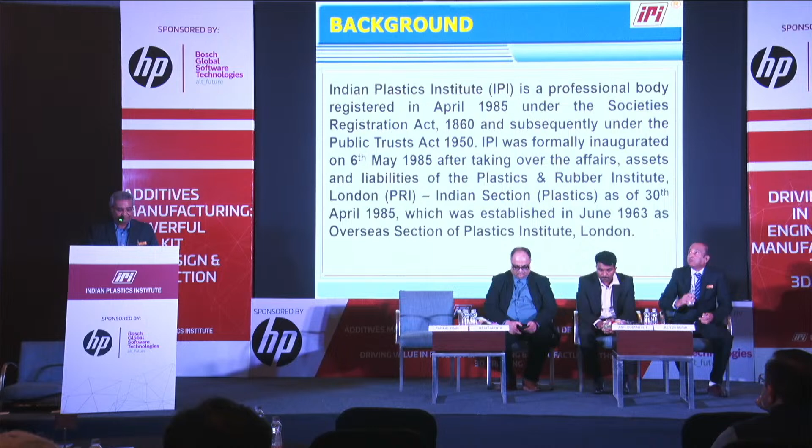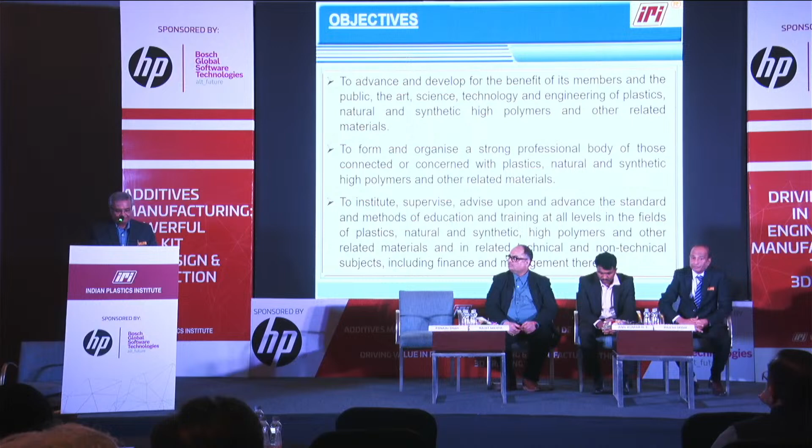IPI activities are increasing every year, and we have started getting recognition from the plastic industry. During the last year, most of the IPI chapters have organized various programs useful to the plastic fraternity. One of our main objectives is to institute, supervise and advance standards and methods of educating and training in the field of plastics. Our chapters at different centers are conducting DIPI courses, corporate learning programs, and organizing various lectures, meetings, seminars, and workshops.

Today, IPI is a strong professional body of industrialists, plastics technologists, academics, economists, and students spread over almost 16 chapters across India, and we also have 2 overseas association partnerships with Sri Lanka and Nepal. We are engaged in educating, training manpower development, and dissemination of knowledge of the latest technological developments in the worldwide plastic industry. The contribution of IPI within the context of Indian plastic industry is unique, organizing technical programs throughout the country, including conferences, seminars, lectures, and workshops.

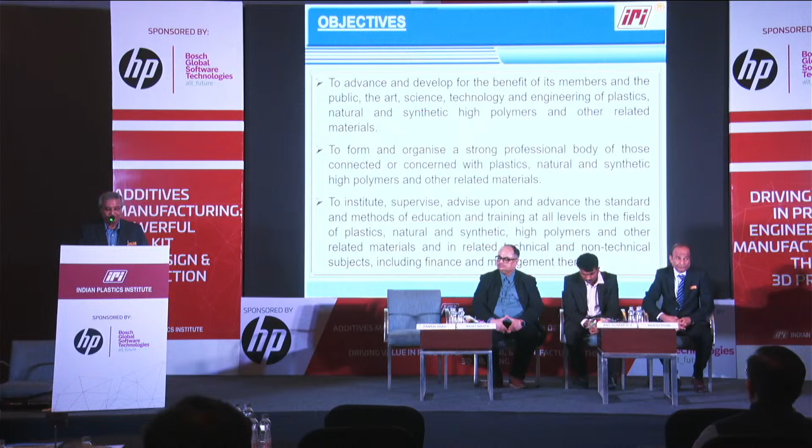In addition to its educational programs, IPI plays a vital and complementary role to universities and other educational institutes in drafting course curricula, providing visiting faculty through its members, and arranging industrial training for students. IPI is represented on the governing council of the Central Institute of Plastics Engineering and Technology, that is CIPET. IPI also represents the Bureau of Indian Standards, that is BIS, for the promotion of standardization and testing quality control procedures.

IPI is spreading its wings globally among global associations and organizations, collaborating with the Ellen MacArthur Foundation, Ocean Recovery Alliance, and so many others. Recently, we have just signed an MOU with Denmark and Germany for the sharing of information on the latest technology. IPI has also partnered, with this, I would now request Rao to take further proceedings.

We shall await the good seminar, awaiting the 3D technical presentation by these two eminent speakers. I'm quite sure when you leave this hall, you will be better in knowledge. Thank you.

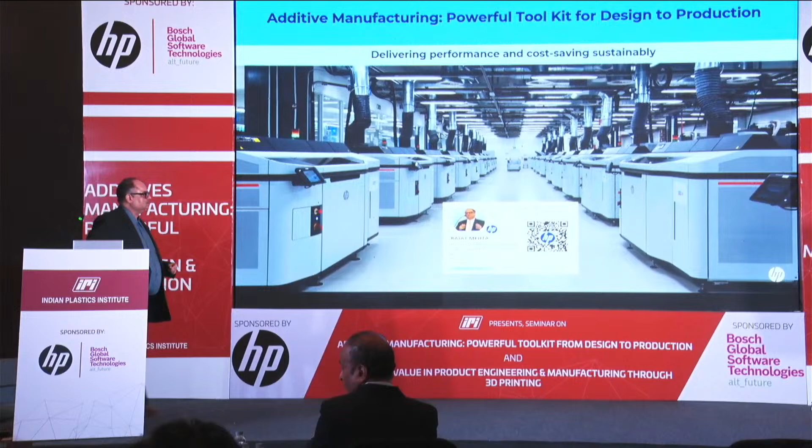Okay, before I start, a short introduction. I have been with HP for 24 years now. You don't find such pedigree these days, people change jobs in 3 years, 2 years, or maybe less. But I have been a happy HP employee for 24 years. This is the 6th or 7th business I'm launching for HP India.

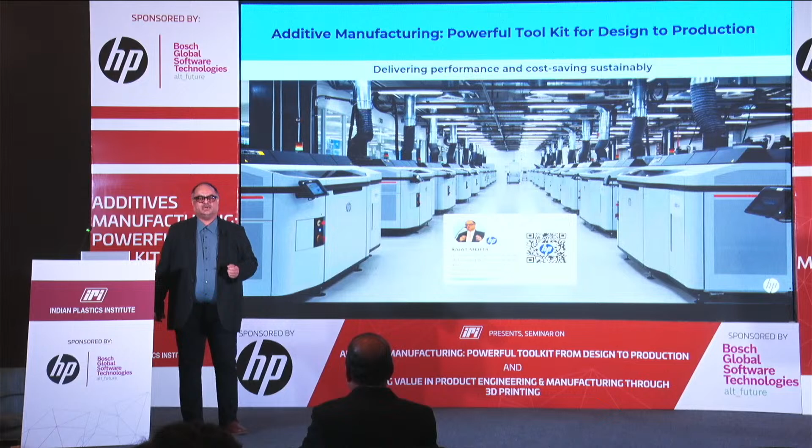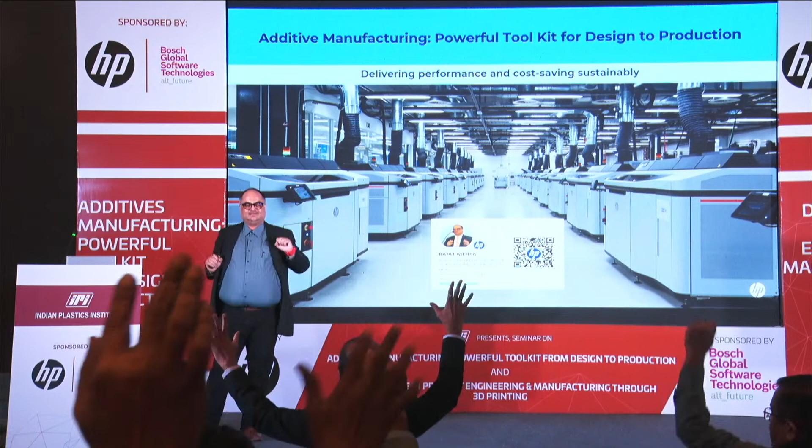It's my privilege to do the 3rd IPI seminar this year. We did it in Ahmedabad, then Baroda, now we are doing it in Mumbai. From Mumbai we move to Bangalore, from Bangalore we come back to Pune. Jai Hind! Jai Maharashtra! Jai Maharashtra! Shinde Saab will be very happy with me.

Then we always break coconuts, right, before starting something. So the coconut has to break. When we throw a 3D printed part, it should not break. So I start by throwing a 3D printed part.

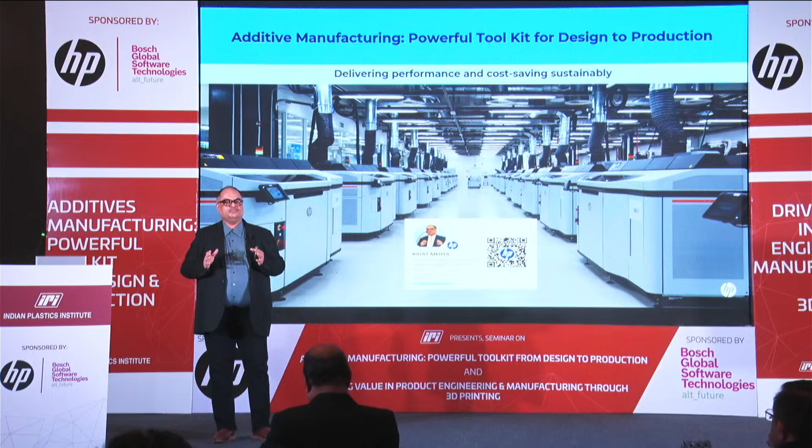The conventional thought process is that 3D printing is only for prototyping. Today we'll break that myth and see how it can benefit you in various stages of manufacturing. While you're seeing the printer, the intention of this seminar is not to sell a printer, so we are not going to talk about the printer at all. I'm not going to tell you about the price, when it is available, what the delivery timeline is, or from where you can buy it. The intention is for you to understand the technology and see if we can fit somewhere in your manufacturing process. And if yes, then we have enough capacity in India, including Maharashtra, to help you produce parts. So you don't have to invest in the printer. We would love to sell, but not right now. You have to find the right volume to invest in a printer later.

Anybody from medical line here? Aarti? Okay, so I have some medical slides also. Sorry, I and Aarti have this game about how many dentists are coming, and she said there's no dentist coming. I was looking at her.

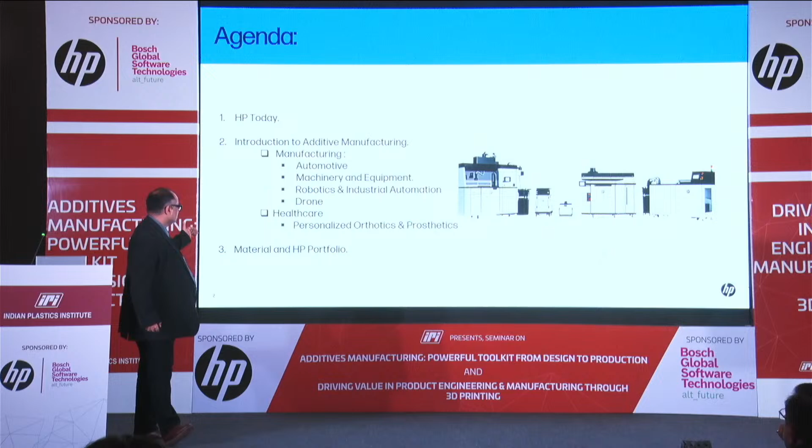So we'll be primarily covering manufacturing, automotive, machinery and equipment, robotics and industrial, and drones. We'll do some bit of healthcare, and a little bit of material.

This event is very special because in 30 years when I used to go and meet industry leaders, one of the biggest problems I used to face is, hey Rajat, you are an IT guy. You know how to build a computer, you know how to build a printer. You are talking about manufacturing a vehicle. Why should we trust you? And it's a valid question.

I don't know, my people don't know how to design a car or an industrial robot. So we said, what can be done differently? In September, we signed a collaborative partnership with BOSCH that we will go together in the market and solve engineering problems together. So I'm very happy to have Anil here, my partner who designed this whole collaboration.

The idea is that if you have an engineering problem, let me give you an example. You have to do, say, a casing for medical equipment and you don't know how to do it. You want to lightweight it, make it as light as possible. That project can be taken by HP and Bosch and deliver the solution to you so that you completely eliminate the tooling part of the job. You do everything on 3D printing.

So this was signed. This is the first of its kind collaboration agreement in the industry. I'm very happy that this is the first event where we are disclosing, where we are sharing this with the IPI community.

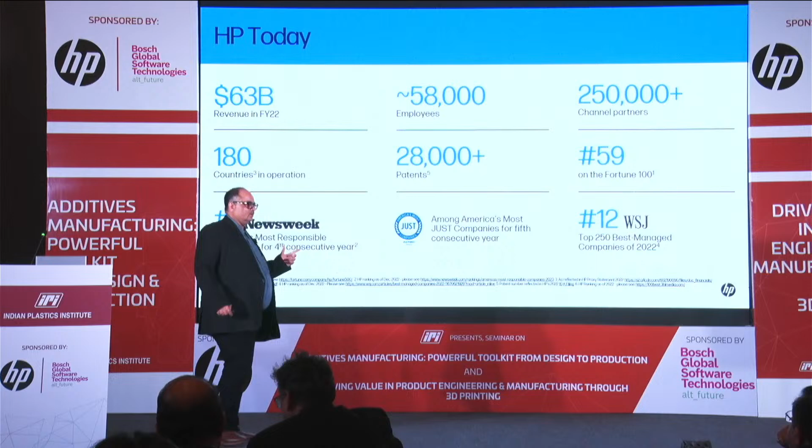About HP, we are around, this is FY22, a $63 billion company, 58,000 employees, 250,000 channel partners. There are a couple of things which are interesting. We operate in 180 countries. We have 28,000 patents.

Now if you look at the entire 3D industry, we have invested around $1 billion in R&D for 3D printers. We launched the printer in 2016. We are the youngest, and our spend on R&D is highest. If you take the 5 big companies, the top companies in 3D printing, they will not add up to $1 billion. That is the amount of R&D we have done.

Now, how many of you know 3D printing? Anybody who doesn't know? Okay, I'll assume I don't know, let me explain. So if you have an apple, and I slice that apple horizontally and give you the slices, and I tell you, can you assemble the apple back? So you'll take the lowest layer, on top of it you put the next layer, next layer, next layer, and you'll build up the apple.

Now I'll make it a little more difficult. If I say that within that apple, I want a TT ball, a table tennis ball. Now that's challenging. For conventional manufacturing, you can't do that unless you cut it and join it later, and joining is very difficult. So what happens is you have 3 processes.

You have formative manufacturing, subtractive manufacturing, and additive manufacturing. In subtractive manufacturing, it's your CNC milling machine, lathe, shaper. You take a block of material and you start removing the material. Okay, so that's subtractive manufacturing.

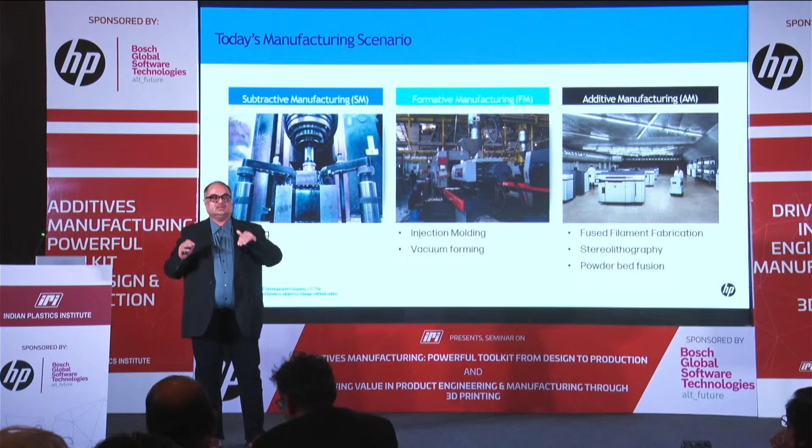Then you have formative, which you are well known for, plastic industry, injection molding, sheet metal industry. You take a material and you form it to a shape, either using a die or a mold. So if you are doing sheet metal, it will be punch and die. You will take a flat sheet, you will punch it, and it will be formed.

So you have formative. What we are propagating right now is that along with that, you can have the third process, which is additive manufacturing. And there are huge benefits of having three processes, and I'll explain why. These slides will take a little more time, and then we'll run through.

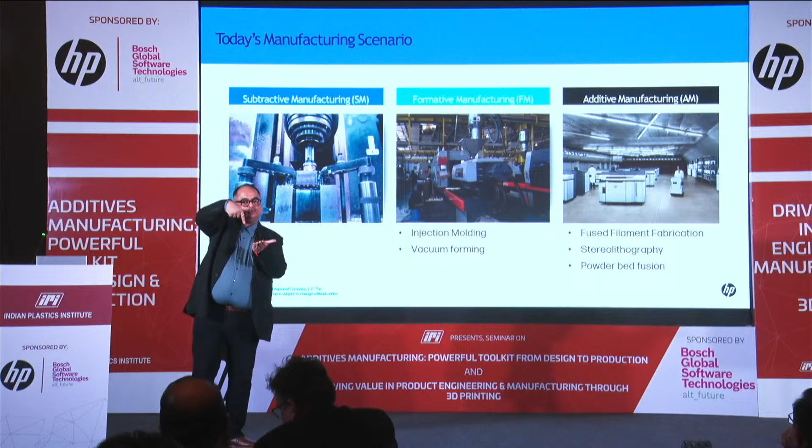When you design on a conventional process, like an injection molded part, what's your constraint? That part has to come vertically out of the mold. When designing that mold, you might say, I don't have a 5-axis machine, only a 3-axis machine, so my tool cannot go like this. So either I tilt the job for cutting, or I have to work with that limitation. So the designer comes with that limitation, constraining himself to the machine he has.

What happens in 3D printing is that the constraint goes off. You can design the part, a rectangle, a cube. Inside a cube, there could be a sphere. Inside a cube, you can have a cone inside. It can be printed without assembly, and I will show you a lot of parts. Now, can it be used everywhere? No. So the designer has to decide which process to use when.

Now the question will be, why do I need additive manufacturing? There are a couple of areas. One is that you don't require tooling for that. So when you're doing additive manufacturing, you remove the tooling cost. If your volumes are say 20,000, 30,000, 40,000 parts a year, additive manufacturing has a lot of meaning and should be evaluated. You're seeing a lot of EV vehicles coming in. Lightweighting is key. Again, in 3D printing you do lattice structures and can have light-weighted parts.

Suppose I had an amputated leg. In that case, a 3D printed socket becomes so much easier to wear. We just launched with one of our partners, a company called Edivise, which will make sockets using 3D printing.

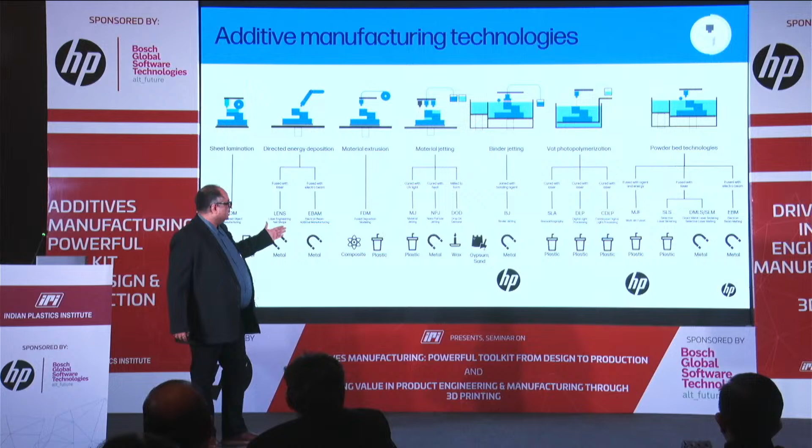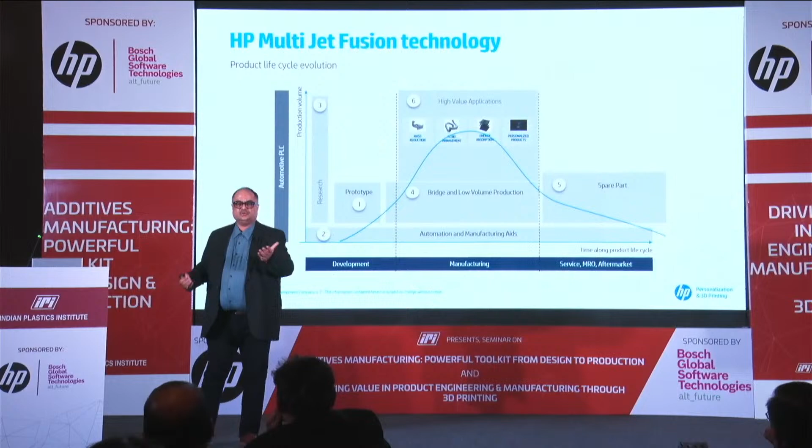Suppose you are doing a car body, which is a sheet metal, free-form sheet metal. It's very difficult to get that block right, where it will rest in the right orientation. I'm a car designer, so I speak in that language. But if you have a 3D printed part in polymer, you can create that bracket very easily in 3D printing, attach it to a metal bracket, and create the fixture very, very quickly. You can save almost 75% of time if you do a combination of metal and polymer.

Your checking gauges. When you're doing mass production, if you're a tier 1 supplier to any of the automotive companies, you have to check whether this pipe will fit or not. So you need a checking fixture. That's a great example for 3D printing. Now, some of you who are not car designers might ask, why do you have to check the pipe? If you have 1 degree variation at the front of the vehicle, by the time it reaches the back, it will be at least 20mm different, and the cutout where the exhaust pipe comes out will not fit. So it's critical that every component is checked. If you want to do CNC testing, it takes a lot of time, so you basically make a receiver gauge and see if it's fitting or not.

Then comes the story of end of life. Now if Mahindra is launching a new version of the Thar, for the old version you still have to supply spare parts. If you have all the tools stacked in the supply chain, you waste so much money. If you can do 50% or 25% of the parts as 3D printing, you print on demand. One exaggerated example: if an aircraft is not working at Bombay airport, you don't have to wait for Boeing to ship you a part. They can send a digital file securely, and you can print it on the nearest printer and put that part in. This is a little exaggerated, but that reality is coming now. So our technology actually goes across this entire bell curve.

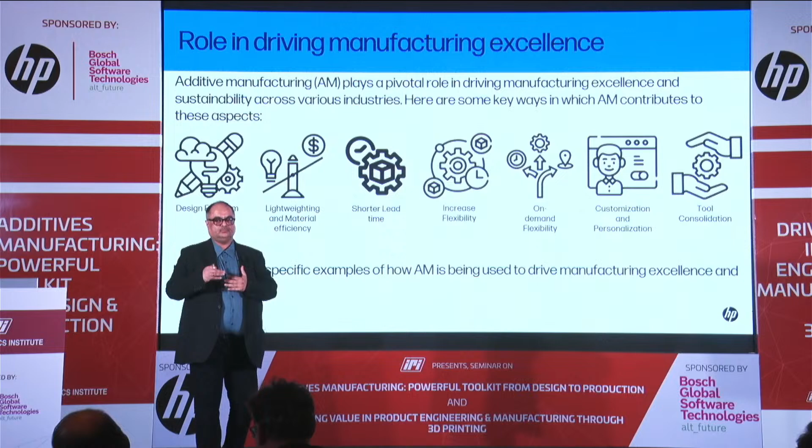And then you can consolidate the tool. What does consolidation mean? If you have HVAC parts—parts used for conducting airflow within a machine or an automobile—you can consolidate the part. Why? Because I don't have restriction of degrees of freedom; I can create a complex compound degree of freedom and do a 3D print.

I'll give you three examples from my own supply chain to make this very clear. Every plotter you buy has this block. A plotter is a large printer where you print drawings. This block was 355 grams.

Typically, when designing the old-school way, people who graduated in the 90s take a higher factor of safety. When you do a higher factor of safety, you end up with a part like this—CNC machined, 355 grams. What is the application of this part? It is a guiding block.

So when this part, which goes into every HP plotter, came to our 3D printing group, they said there's no load bearing here. They did a CAE analysis and created the first version in polymer instead of aluminum—from 355 grams down to 80 grams.

Then we asked, can we reduce it further? So they hollowed it out—what we call a lattice structure. We hollowed it, and it went down to 55 grams.

And then we did something called generative design. For people who are new, or business guys and not engineers, generative design can simply be understood this way: if you look at a tree and want to predict how the branches come, there's no formula for that. No human can predict what God or nature is using for the tree to grow.

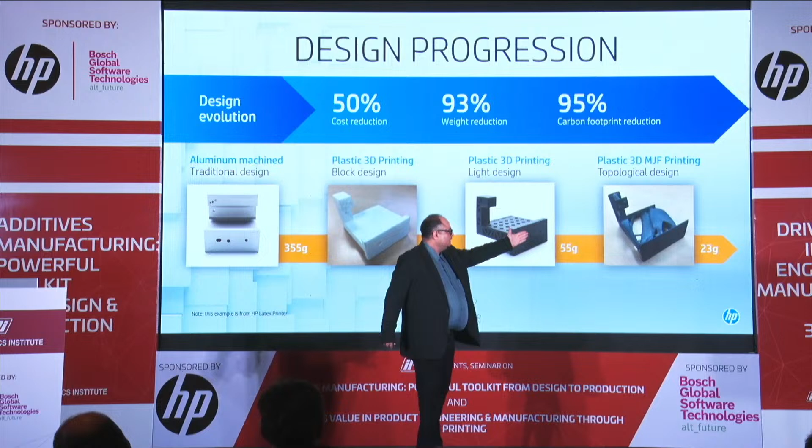Some of that algorithm has been put into the software, and you get structures like this. This basically reduced from 355 grams to 23 grams, and you can see the savings on top.

Another classic example: a slurry extraction tool in our laser drilling machine. It extracts the slurry and puts it in the bin. It had an MOQ of 13 parts, costing $450. If this part failed, it would take 3 to 5 days for the machine, and the entire line used to stop. This whole part was consolidated into one 3D printed part, which you see here, from 575 grams to 52 grams, and $450 to $18.

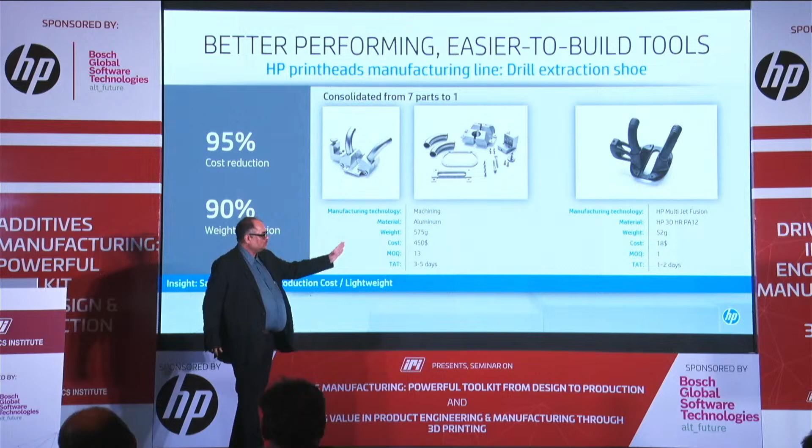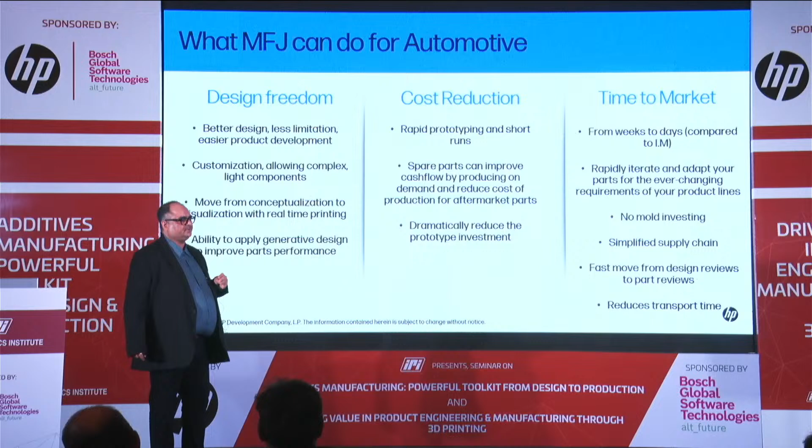Let's look at some examples. In automotive, there are three great things 3D printing can do: it gives you design freedom, cost reduction, and time to market. These are some of the examples on the field.

We launched the printer worldwide in 2016. From 2018 to 2024, we've seen one major brand or other adopting 3D printing for production. So it's not a fad, it's actually happening. China is flourishing right now with 3D printing, and we're hoping India will catch up - that's why we've partnered with IPI and BOSCH to make this technology popular in the industry.

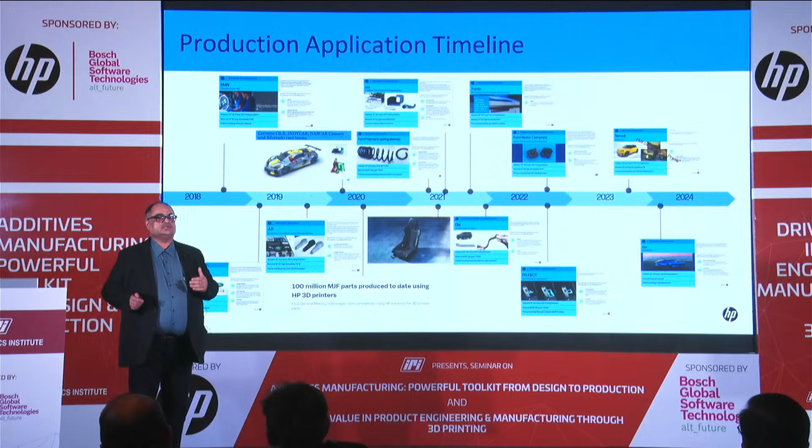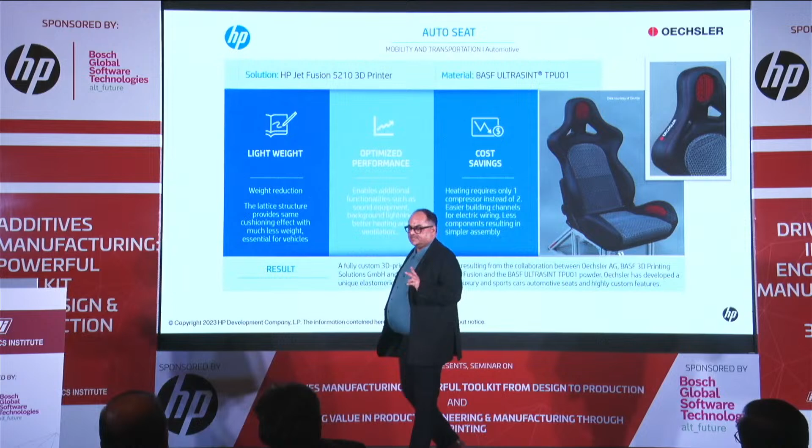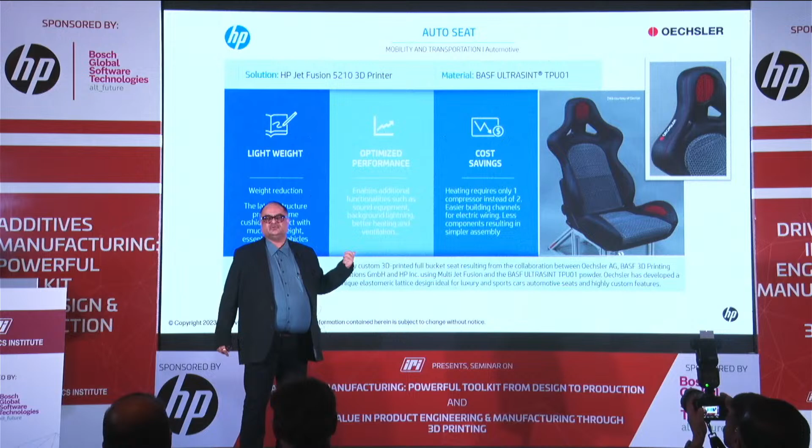This is a company called Oechsler. How many of you have ventilated seats in your car? If a person like me sits on a ventilated seat, the air doesn't flow properly because my weight compresses the foam and the air doesn't flow. This is a great example where they've replaced the foam with a lattice structure TPU, which you can see here. There are two advantages: the air can flow very easily, and second, in an unfortunate accident, this absorbs shocks much better than foam. It's also much more eco-friendly because it's 100% recyclable, and it's fire resistant.

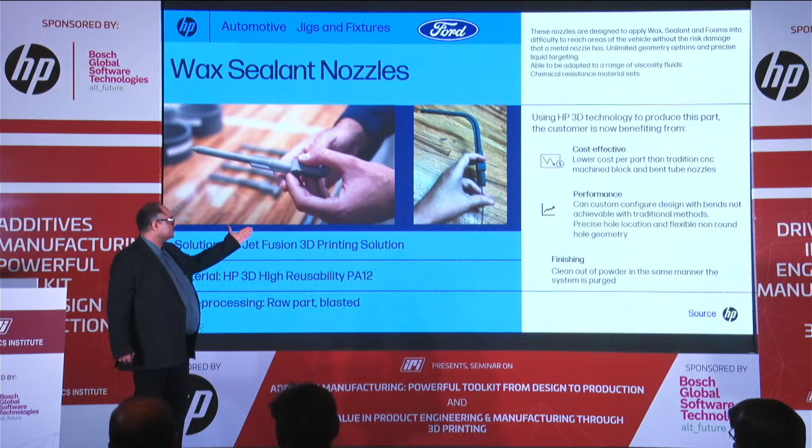This is another innovative one - a wax nozzle used on the shop floor. If you need a different shape of wax nozzle, you can do it in less than a day's time, giving you a wax nozzle which is curved like that. This is another example from Ford.

This is an example of bridge tooling. Suppose you had a conventional injection molding tool and that tool broke. What would you do? You'd try to repair it or send it to the vendor who supplied the tool. What happens in that interim period? You can use 3D printing to create the part and fit it in the automobile.

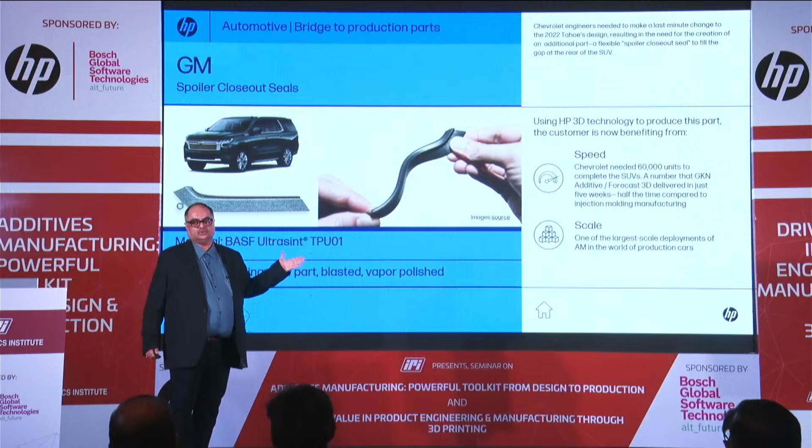It's very interesting - people who buy cell phones regularly, if you look at a 3-year phone cycle, companies make more money from selling you covers than from the cell phone itself, especially brands like Spigen. So customization and personalization means making a standard product your own product. It could be an insole for a shoe, a dashboard customized for your friend or family, or a cup holder.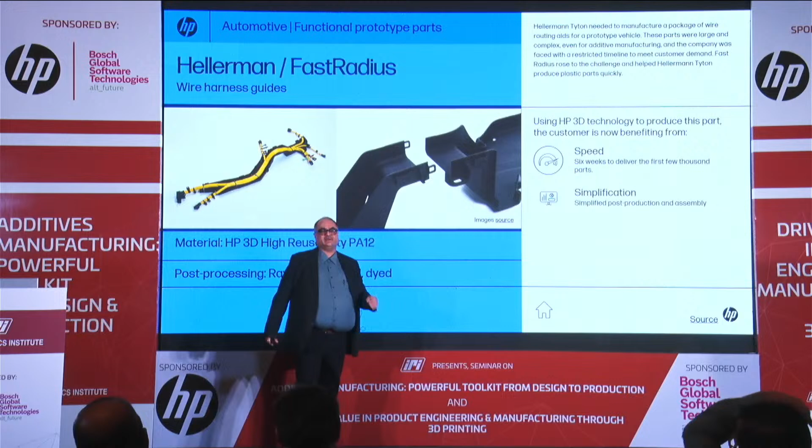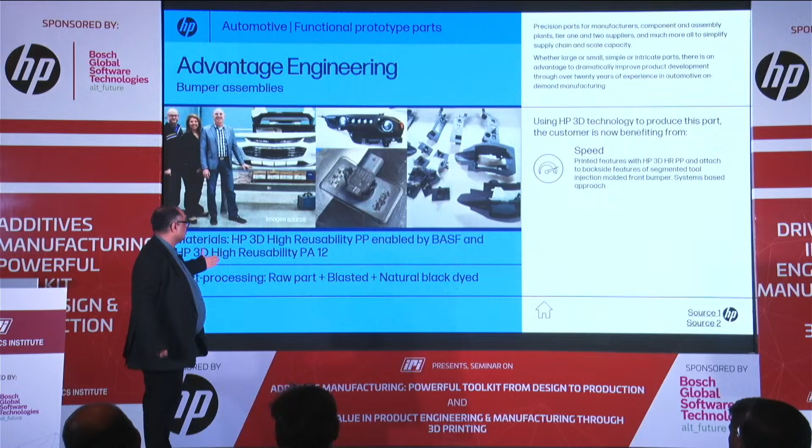If you have very large parts, we can do large parts for functional prototypes and prototyping. We can even do the bumper itself.

Another example to keep in mind is jig and fixture tooling on your shop floor. A simple example: if you're manufacturing a 200 milliliter Colgate tube and then switch to 500 milliliter, you require a different holding device, typically made of metal, which is very expensive. You have to stop the line, unscrew the metal fixture, and put in a new one. But with a 3D printed fixture, it can be snap fitted. Now we have ESD material, so it can be electrostatic discharge compliant, meaning even in an electronic line we can have fixtures that comply with shop floor requirements.

This is a classic example, a compound angle. Normally you'd need a CMM machine, a coordinate measuring machine, to measure the dimensions of this pipe. But with a 3D printer, you can create a gauge where even a normal worker can check it, if the part goes in, it's a pass, if it doesn't, it's a fail. Simple innovations that save a huge amount of time.

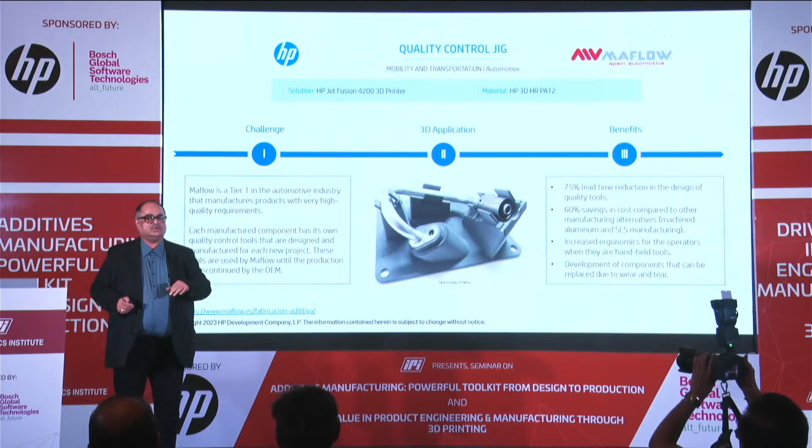If you go to Volkswagen, Tata Motors, or any of these companies and look at the time and cost they spend on jigs and fixtures, it's mind-boggling how much money can be saved. We have Amuse 3D in Chennai, who is actually producing dedicated jigs and fixtures on the machine.

Then you have personalization for key fobs. If you want your key to look a little different, you can have this.

Then we look at machine equipment, where the amount of money saved is much, much higher.

This example is very critical, a can twister. If you buy a Coke can, the cans typically move on the line horizontally, but for filling they have to be turned vertically. This mechanism does that. On conventional manufacturing, you'd make each of these pipes separately and then assemble them together. With 3D printing, it can be done in one go.

Similarly, we talked about sustainability. Wherever you can save metal and use recyclable plastic instead, sustainability is achieved. We're working with many petroleum companies right now to convert metal to polymer, trying to convert stainless steel, aluminum, or other metals to polypropylene. This is happening live in most oil companies in India right now.

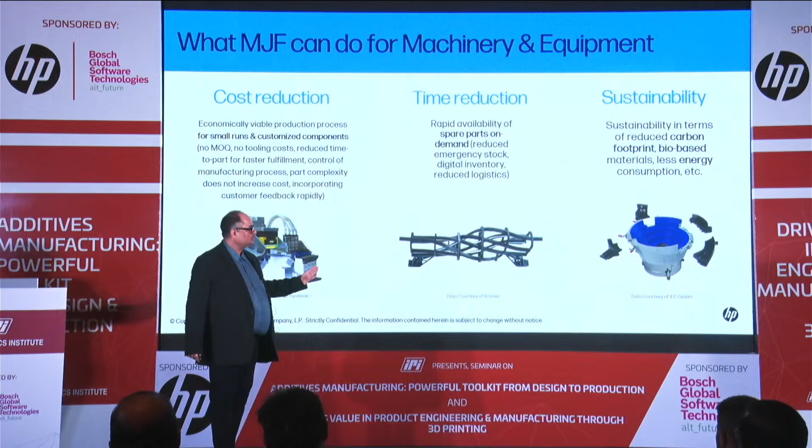These are a lot of examples from processing, packaging machinery, agriculture, textile, woodworking, and other equipment.

This, by the way, is an L'Oreal mascara. I was giving you a toothpaste example earlier, this is a mascara holder. When the mascara is being filled on the line, these are basically the holding fixtures for that. The beauty of this is that you can create a prototype where the brush, the cap, and the base are printed in one go, without the need for any assembly.

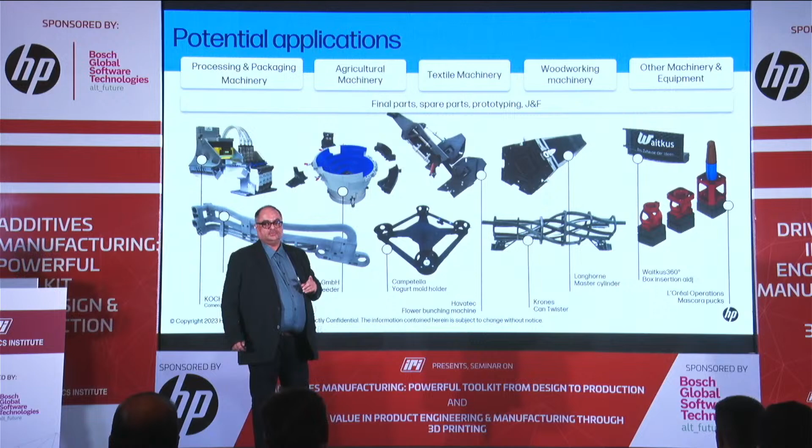Robotics is another great area. You use servo motors in robots, so industrial robotics will use servo motors. If I make all the end of arm tooling in metal, I need increased power for the servo motor. But if I can convert that end of arm tooling to polymer, the robot consumes less electricity, and my servo motor voltage requirement goes down. This is another example where 3D printing plays a big role.

Another example is picking up something delicate. Having a plastic or polymer end of arm tool is much safer, so we can pick up the glass very nicely and put it on the assembly line wherever it's required.

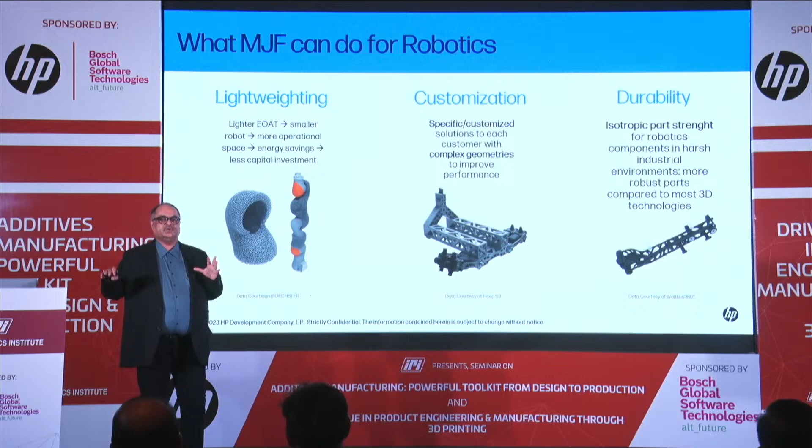And there are tons of examples. I'm not going technical at all today, but I'm just giving you some ideas. I'll introduce my friends here who can print it for you, who can design it for you, so you don't have to buy a printer for that. These are some of the examples.

Now if you look at this one, I don't know whether it's visible at the back, this is all madhumakhi ka chatta - lattice structure is nothing but beehive. The inspiration in 3D printing comes from nature, whether it's generative design or hollowing structure or lattice structuring. Madhumakhi ka chatta, by the way, is the strongest structure, and now people are using that structure for spacecrafts, because it not only makes the weight lighter, but gives you much better strength.

My favorite topic, drones. So which was the company which made headlines recently by going public on drones? Any idea? Any idea which is the Indian company who manufactures drone, which is now listed on stock exchange?

Great answer. So Idea Forge started the work with us almost, Jana, was it 4 years back? They started in a small room, and all the parts were done by Jana. Jana, can you stand up? Jana is general manager for Redington, who's our partner. It started with small experiments - give me 5 parts, give me 10 parts, like that. Today, their entire drone is done on 3D printing. They're not only feeding Redington, which is Jana, but it's feeding 5 more service bureaus of ours.

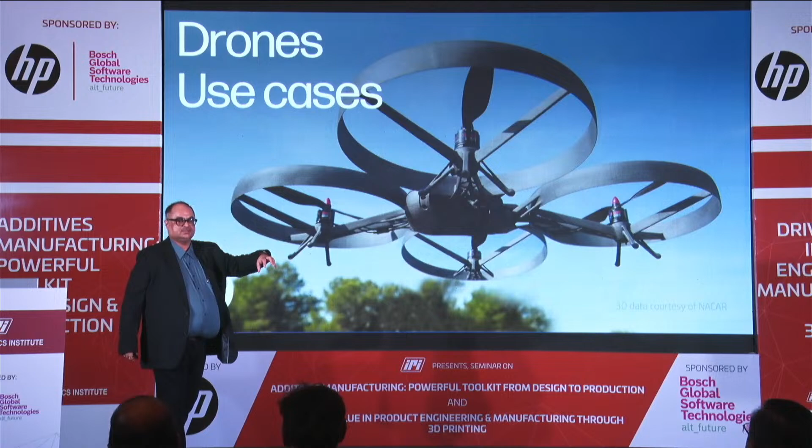One of the bad examples was throwing tear gas shells on farmers, but again, the drone was repurposed for throwing the tear gas shells - wrong example, but that's the example. You can do the entire casing for drones, which you can see here. You can do underwater drone parts, which go inside the water, which means the parts you are creating with engineering plastics are inert to water, gasoline, or any chemicals.

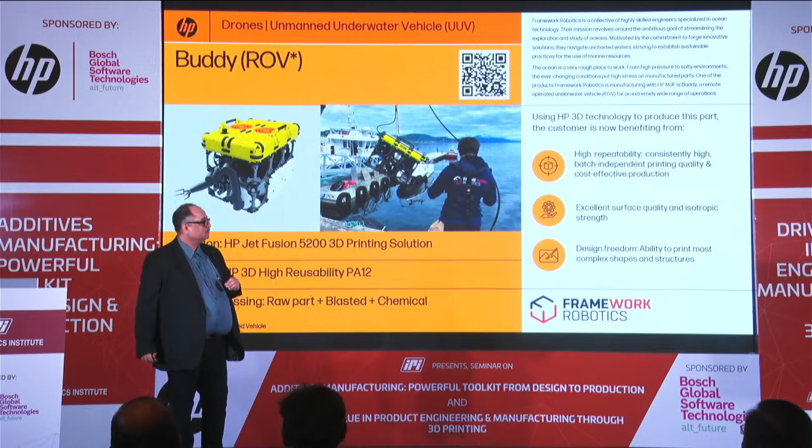This is a startup, Vecros, started from IIT Delhi. 2 young kids, 23 and 24 years old. They started this business as part of startup incubation.

Anybody has known Vecros, where they were recently? How many of you do Shark Tank? How many of you see Shark Tank? Most of you, right? The drone company which came in Shark Tank and got 1 crore rupees from Aman was actually Vecros. The entire drone is done on HP.

This is a camera module for drones. The entire module which you see here is printed in one piece. That's the beauty of 3D printing - you have compound angles, complex angles, and you can do it in one piece. You don't have to create assemblies of parts.

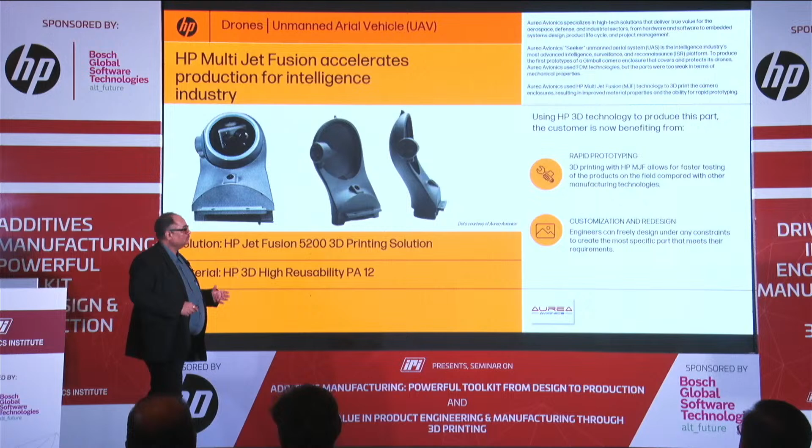This is another good example. It will not be visible from the back, but these are aerofoils. So if you have large drones - where was a large drone used recently? In Israel, to drop a bomb at a very well-known person's house. So in such kind of drones, you need aerofoil to make it lightweighted, and you can use 3D printing to lightweight the drones.

Now that's again a bad example, but a good example would be climatic surveillance, how the climate is changing. Or in Rajasthan and Punjab, you have tidde - you know what tidde is? The flying crickets. They spoil a lot of agriculture, they create a lot of problems. There, these surveillance drones can be a great asset.

This is a beautiful example of generative design. You could have a structure like this. There's no way a conventional manufacturing process can make this part in one piece. And obviously they cannot make the part itself, because you would require maybe a 15-axis machine to machine this part. But this can be done in 10 hours of printing and 10 hours of cooling, and you can print probably 100 such parts in that 10 hours' time.

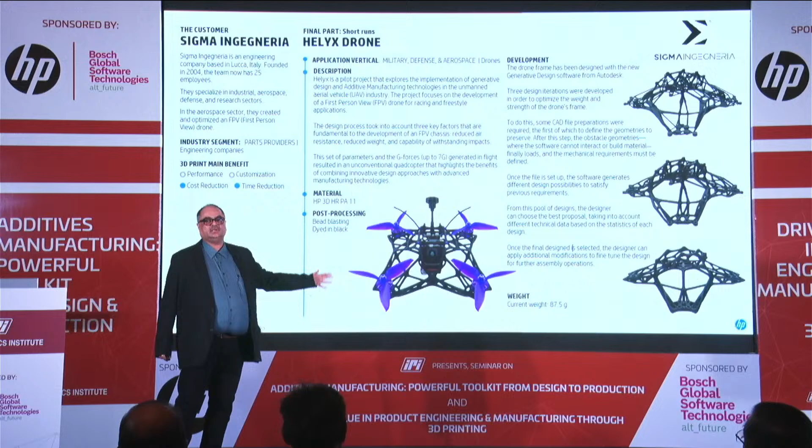This is something which is very close to my heart. We use substandard sockets, so people who have unfortunately got an amputated leg, we do manual making of sockets. It's very, very uncomfortable and unhygienic. You have people having rashes, so they will have bandages, and on bandages they will try to insert the foot. Or somebody breaks a hand and they will have a plaster, which after 1 month you need something like a knitting needle to put inside because it's so itchy, because there's no air circulation.

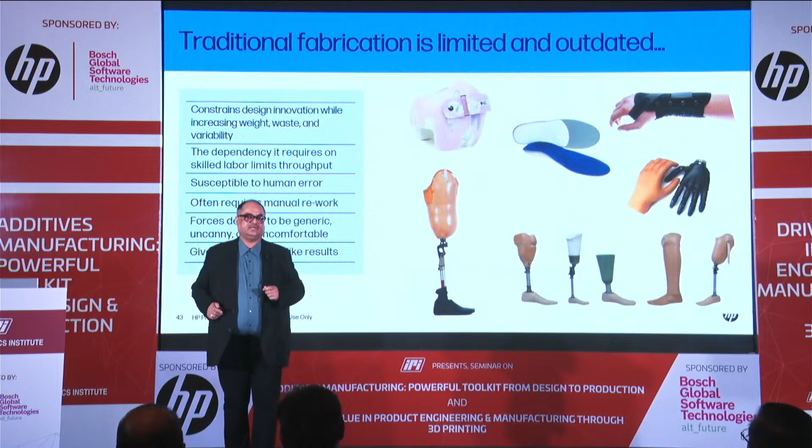I have a customer in Delhi named Adroitech. They created solutions for people who have got 99% or 95% burn on one part of the body, and it's completely gone. When they're trying to do skin grafts, you need to keep that part of the body exposed. They have created a 3D printed chamber with air conditioning to keep the arm cool and inert to all infections. So there are very innovative things you can do with 3D printing, especially in the orthotic and prosthetics area. This is what happens when you start using 3D printing.

This is the insole. Somebody breaks a hand - instead of having that itchy plaster, you could have just a 3D printed cast. And these are live examples which are available in India right now.

A child with a cranial defect or skull defect needs to protect the skull. When I was in 9th standard, I broke my skull - that's why I'm a little erratic when I talk. The doctor told me that for the next 3 years, I should assume I'm wearing a helmet which is 10mm thick, so that I should not bang my head anywhere, otherwise everything would collapse. But if you have a cranial helmet for kids as well as adults, this is protection, and it's very lightweight, because you can see all the holes here, which makes it lightweight and aerated.

How many of you have heard of Jaipur foot?

So we are recently talking to Jaipur foot and telling them that you can do better than plaster of Paris sockets. This portion is 3D printed, assembled to a metal, and then you have a blade which is again 3D printed, so people can run even with amputated legs. You'll have seen a lot of what are called blade runners - the blade runners were all 3D printed.

This is very common - when you go to a good hospital which wants to make money and you say that I have spine pain, the straight answer is that you go for spinal surgery. When a person goes for spinal surgery, you need a brace around to keep it straight till the time healing starts, and you can have 3D printed braces for that.

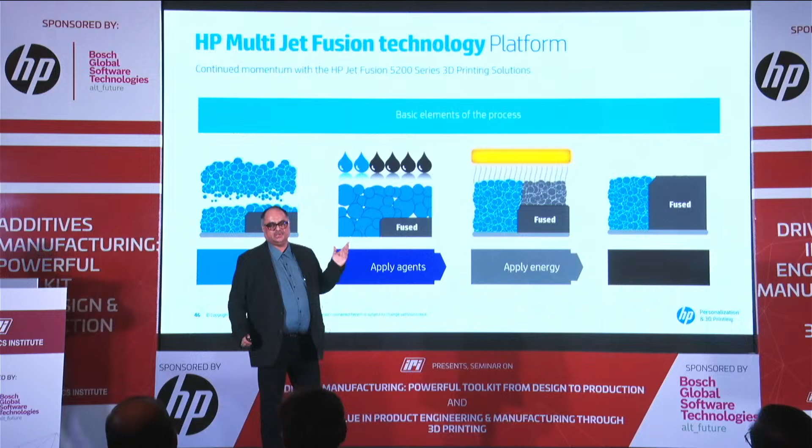Because this is a technology developed by HP, by varying the fusing and detailing agent, I can change the properties of the part. Most of the parts you see are in gray color, but I can print a white part on the same machine by changing the agents. In future, I can have transparency coming in with powder technology.

For people using 3D printing for now, we don't use any support structure, so you don't need to clean the supports. The part comes in, you do a bead blast, and you have the part ready.

This is a portfolio of machines which we have. I'm not going into details, but these machines are amply available in India. All we want is basically that next time when you are doing an industrial design and you have a problem, please call us and we will try to help you solve the problem. See if we can eliminate tooling for at least some of the material.

We took an oath to make it sustainable. So if we don't do the tool, we are saving so much of metal.

So in Bombay, we have... Arpit has come? Arpit? Come to the front.

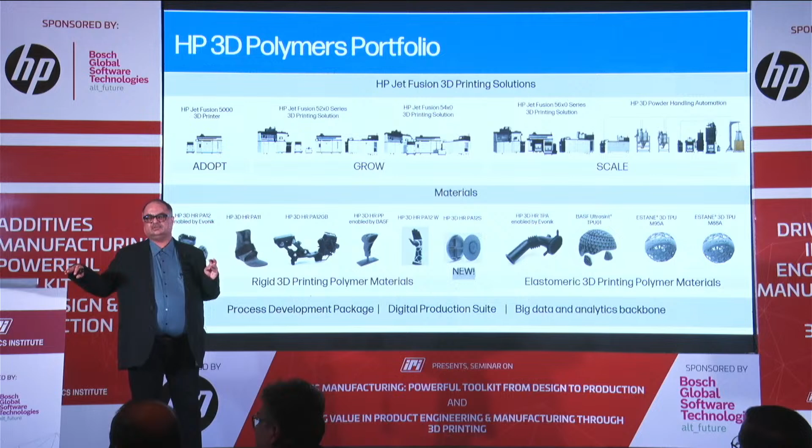Arpit is from Immaculate 3D, well experienced in 3D printing. He's based out of Bombay and now he's opened up an office in Bangalore, so you can contact him. Again, we don't want you to buy a printer, we want you to use the technology. So Arpit will help you.

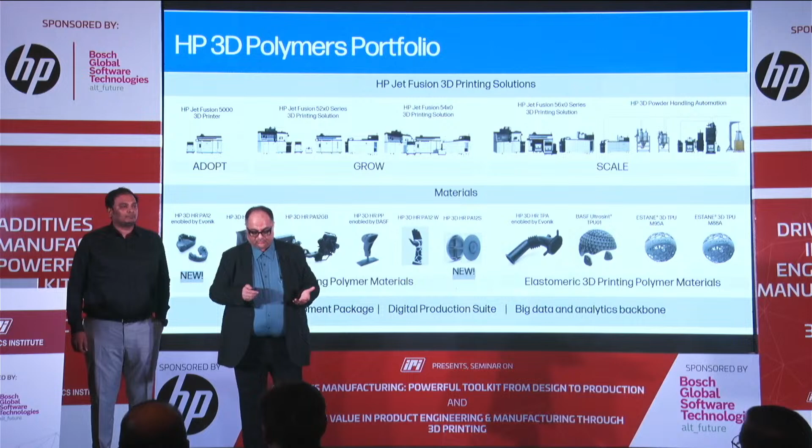We have another player, which is Imaginarium. A lot of you know them. There are many printers from our side, you can use Imaginarium. If you want somebody next door in Pune, we have Create 3D. And Arpit is expanding, so what you saw here, Arpit is actually manufacturing this for my partner Ediwise. So thank you, Arpit, for helping us.

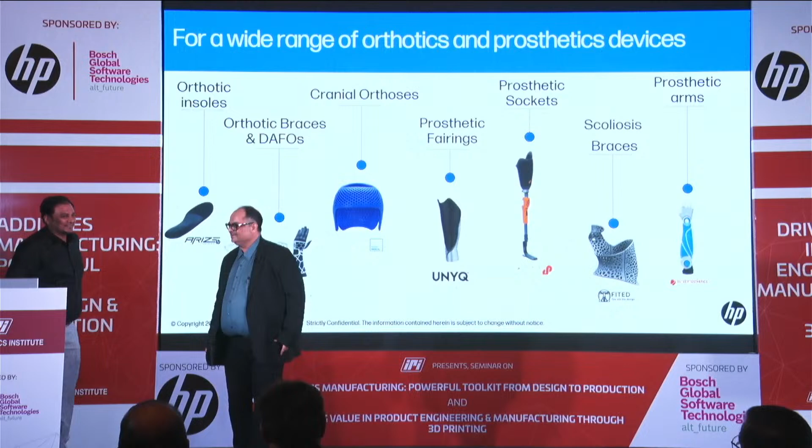You want to say something? No, you can go ahead. Okay.

So the idea is that you start using the technology. When you feel that volumes are right, we will come to your office and say that you are hitting a critical mass, it's time for you to invest in the printer. You don't have to do a capital investment on the printer, we'll give you a printer on lease. Okay?

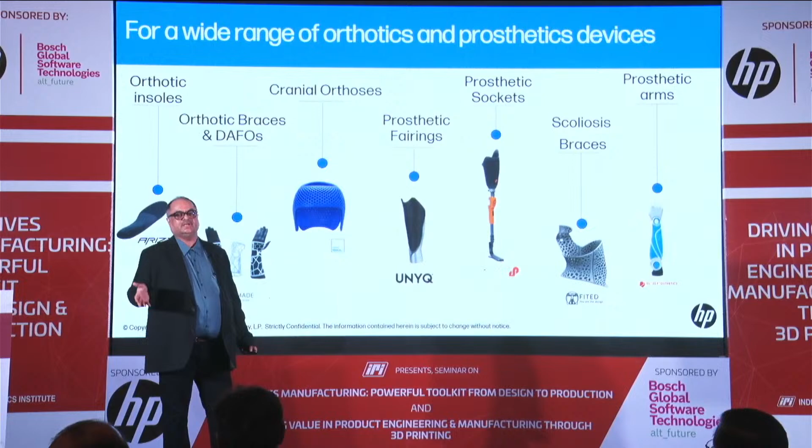You can have various types of fit. Like your question would be, while I can print in plastic, but I need an insert to screw the part. So you can have metal inserts, and you have examples, Basha, right? Can you pass that part around? You can have snap fit, you can have ultrasonic welding, so you can weld the parts together which are plastic. And you can do adhesive bonding also. So there are various ways of joining the parts.

You can have various types of finish.

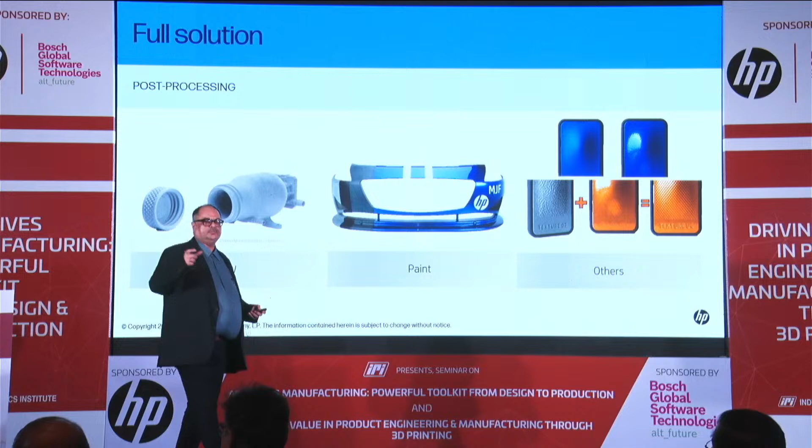For people from the medical fraternity, clear aligners is something which is becoming very popular in India, started by Invisalign. Now Clove Dental is trying to get into that business. This is a great example. You can manufacture 1,000 molds, right, Jana? 1,000 molds for dental, yeah. 1,000 molds you can do in one build. So in 10 hours, you can build 1,000 molds, and then you can do thermoforming and create clear aligners. So another great example. Thank you, Aarti, for not telling me there are doctors, but I'm still reiterating that you could have 1,000 molds coming in from one build from the printer.

Now what you see here is a normal painting. So if you buy a vehicle, what they use for other material, they will use the same process for painting the car. How many of you have the XUV 700? The first 400 vehicles which came on the road had 3D printed parts, and Anand Mahindra actually asked the engineers to look at more possibilities of using 3D printed parts. It was done by a company called ITW, and again done by Reddington for ITW.

All these materials we are talking about are certified, so it's not that these are uncertified material, these are industry standard material with all the certification.

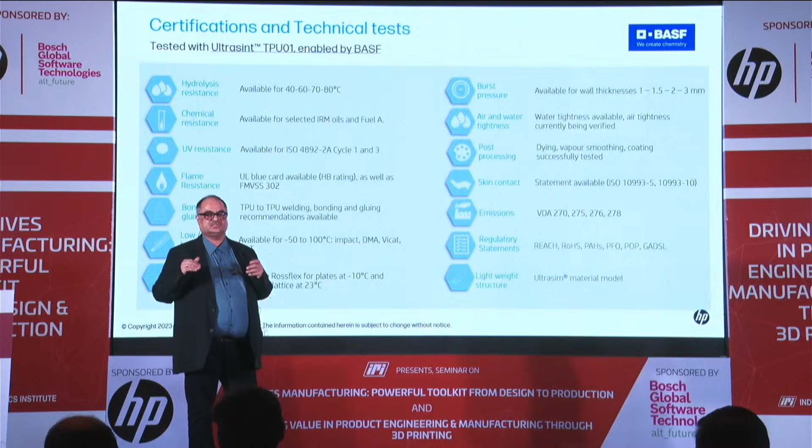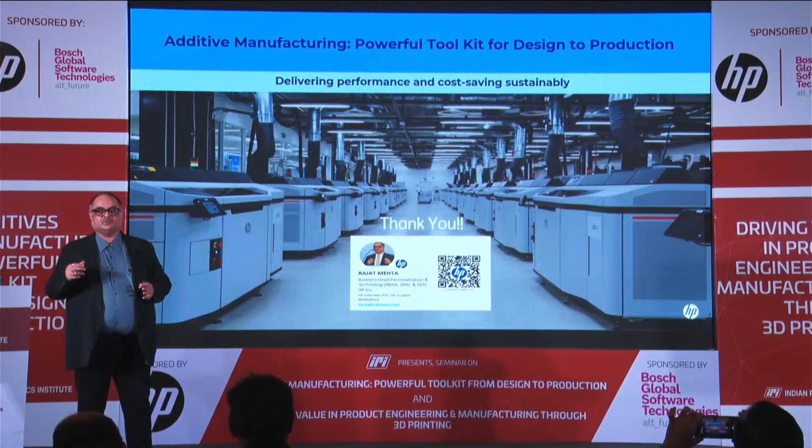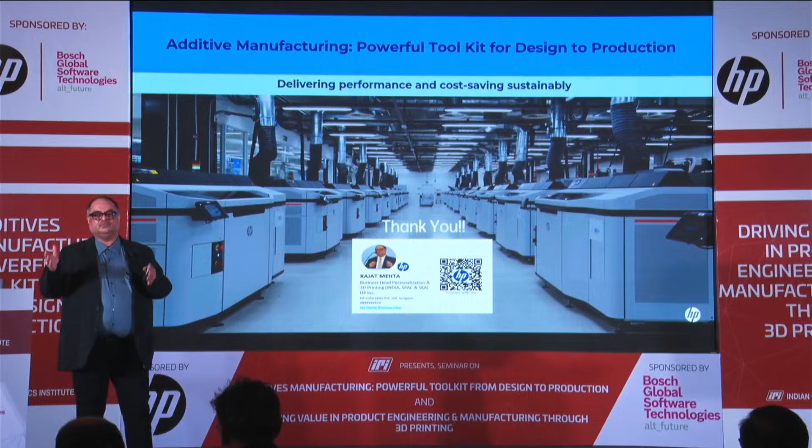I've kept my talk very, very non-technical. The idea is that we don't want you to get lost in the technology, we are there to solve it. Give us the problem. If it's just a printing requirement, you could go to Arpit, and Arpit can print it for you, or you can go to any of the service providers. But if it's an engineering problem, where you want to do lightweighting, complex parts, end-to-end tooling to be done, you contact me or Anil, and we will solve that problem and give you the complete solution as a turnkey. Okay? With that, I will finish my talk.

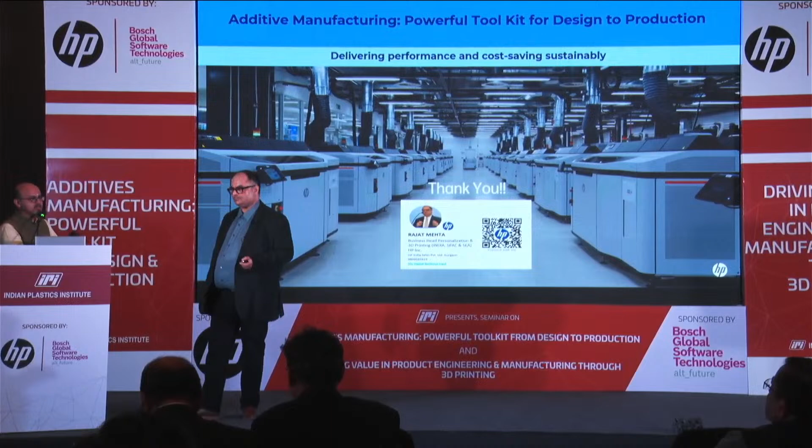Yeah, sure. We do the question answer in the end or now? We have a Q&A session, so once we are done with the second presentation, we'll have a Q&A together. Yeah. Anil?

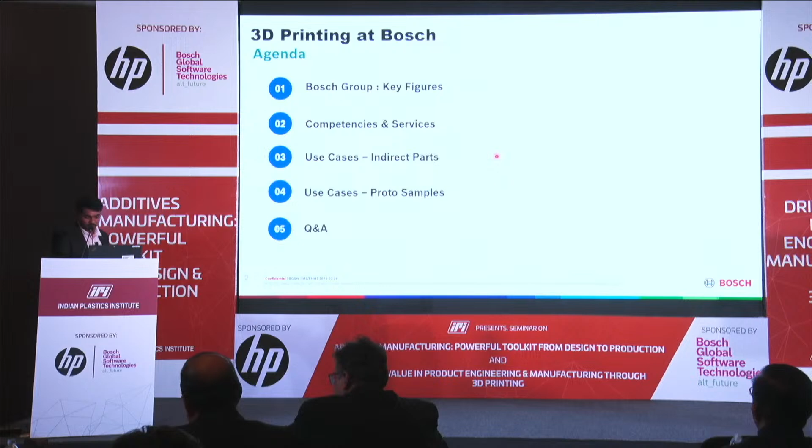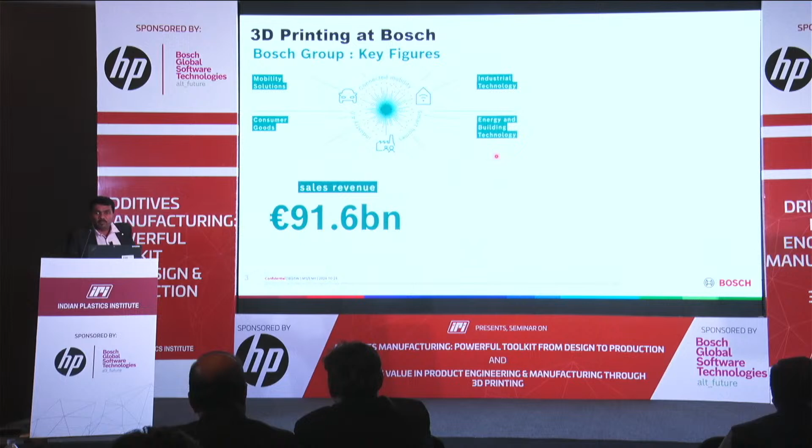Quickly, I will go through the key figures for BOSCH group. We are into 4 different vertical segments: mobility solutions, industrial technology, consumer goods, and energy and building technology. So this is our main focus groups. So far, we have generated revenue of around 91.6 billion up till 2023. We have 430,000 associates across worldwide, and 468 subsidiaries and regional companies across 60 countries.

So what are our competencies? What is BOSCH focusing on in additive manufacturing? We are the CoC for additive manufacturing. We take care of all additive manufacturing related activities, starting from consultation, design, simulation, and then printing, for the APAC region. Since 3D printing is a niche area, creating awareness always plays a vital role.

For that, we conduct a lot of trainings, seminars, and webinars to create awareness on additive manufacturing. Once we do that, then we get into technical consultation. This is mainly to define the roadmap and also the strategic implementation in your areas.

And the next thing is DFAM, Design for Additive Manufacturing and Simulation. Most of the time, people take the conventional design and then use the same design for 3D printing. To get the maximum benefit, we have to do the redesign for additive manufacturing. That's what we do. For that, currently we have been using Creo, UG, and SolidWorks for design software, and for simulation we are using Simulia and SimuFact.

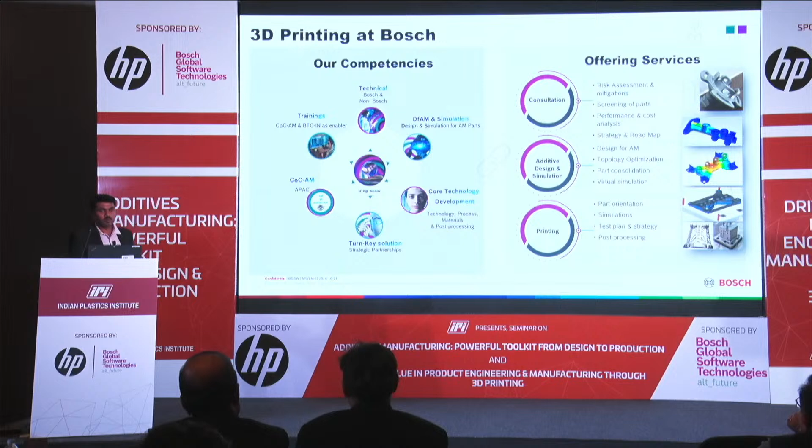Since we are going to change the design, this design has to be verified, so we do the simulation process. The final thing is printing. For printing, we have in-house polymer printers, and if it is not possible to fulfill the customer's requirement, then we get it done from our vendors. This is all about our competencies and service offerings.

What are all the matured areas in 3D printing? In Bosch, we believe that 3D printing is a game-changing technology, especially in the manufacturing scenario. One of the areas is indirect parts. Indirect parts are used to manufacture our direct parts, mainly in the assembly lines, like fixtures, grippers, gauges, and part handling systems. So these are all the indirect parts.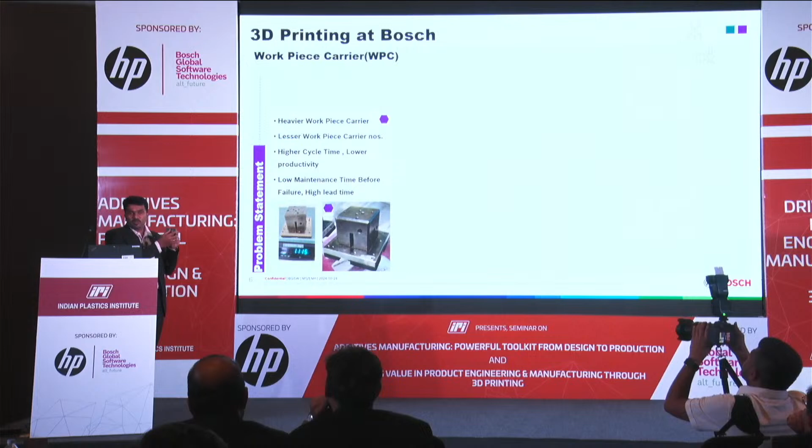One of the classical examples is, when we got the project, we usually go to the customer place and the first general question is what is your pain point. They said this is a black color wear pad, and the problem is it wears every 2 to 3 weeks, it is imported, and it costs around 600 rupees for one part.

We started looking at localizing this. Then we came to know this wear pad wears because of the weight of the WPC, the workpiece carrier. This is used to manufacture our glow plug component in one of our plants. It is kept on the moving conveyor and moves from one station to another.

Then we asked, instead of owning just the part level, can you own the complete assembly level? They agreed. When we started, we did not have CAD data, because for 3D printing, 3D CAD data is a must. Even though we had the manufacturing drawing, we had to reverse engineer it and generate the 3D CAD file.

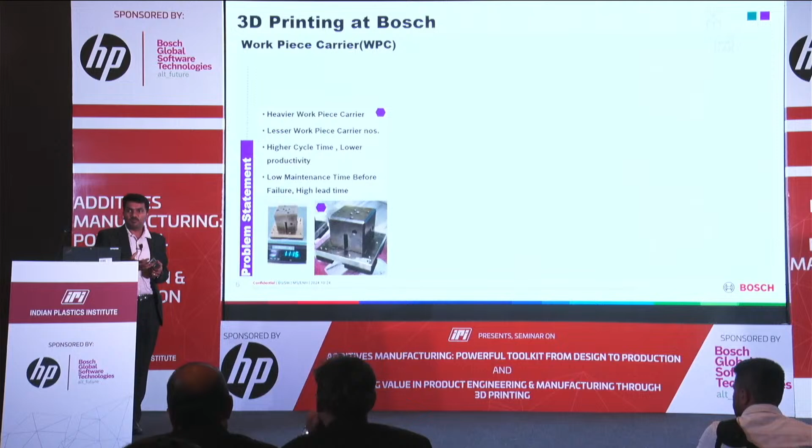First we started with the plastic component. When we showed it to the customer, they said go ahead and do one sample. Then we consolidated all the requirements and the problem statement, and came up with this 3D printed, topologically optimized, consolidated part.

If you look at this part, this is a classical design for a conventional part. If we use the same design, we don't get the maximum benefits, so we had to reduce the weight of this part. The weight was almost 1.1 kg, now it is 0.58 kg.

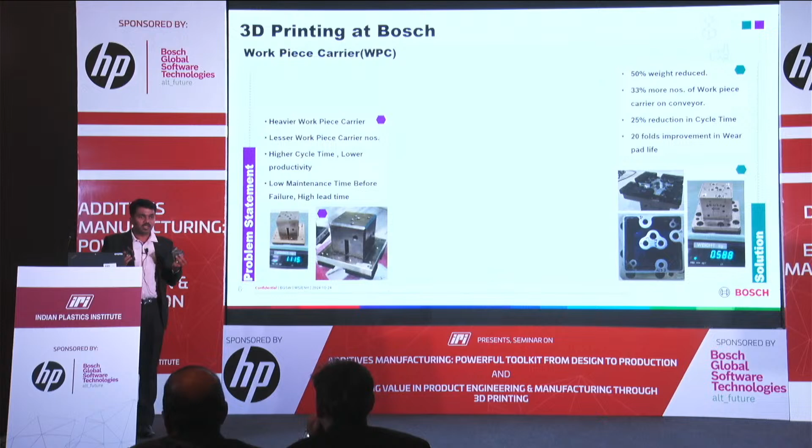Even though they wanted to run with 85 to 95 fixtures in the line, they were running with only 50 to 60. Because of this weight reduction, now they're running with more than 85 numbers. So this kind of value addition is what we have been giving.

If you look at the weight, here's a video I'd like to show. This glow plug is our direct component, and the fixture is our indirect component. This is how it moves from one station to another. Now they are running with more than 85 numbers, the cycle time has been reduced, and they are getting a lot of benefits.

When we handed over the first iteration, they gave one more problem statement. If you look at this wear pad, it is fixed to the base plate using 2 screws. They asked, can you avoid the metal screw, because if they don't monitor the wear on the wear pad, the screw gets damaged in the conveyor belt. So we introduced a snap fit mechanism.

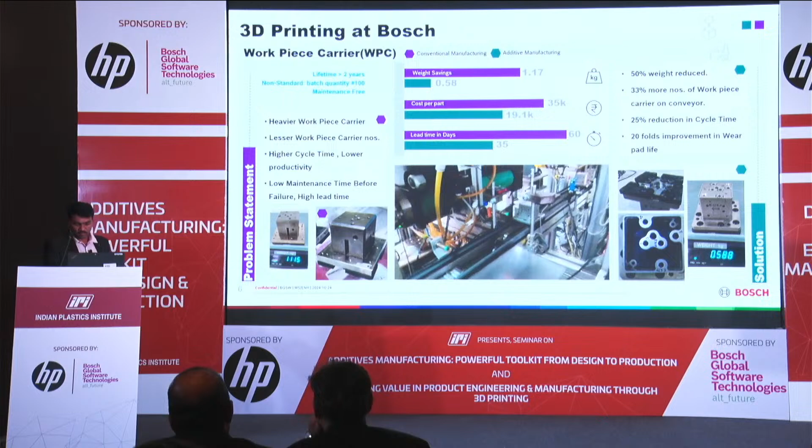Now it has been more than 2.5 years and they have not changed the wear pad, whereas earlier it was 2 to 3 weeks because of the weight. These are all the use cases we have done. Now the workpiece carrier has become a low-hanging fruit for 3D printing. Wherever we go to Bosch plants, since our products are almost similar, we usually find and implement this.

Now another workpiece, but it is a plastic component. Here they did not have any weight issue, but since it was an imported component, the issue was larger lead time and cost.

First, since it is a supplier or OEM part, there were no manufacturing drawings, they only had the physical sample. So we took the physical sample, reverse engineered it, and generated the CAD data. Now we have implemented almost 100 numbers in the line.

For the first year it is almost 12,000 per part, even though they need around 100 numbers, but the next year it will be approximately 2,000 to 3,000 per part. The first year costs more because we took a lot of energy and effort to generate the CAD data through reverse engineering.

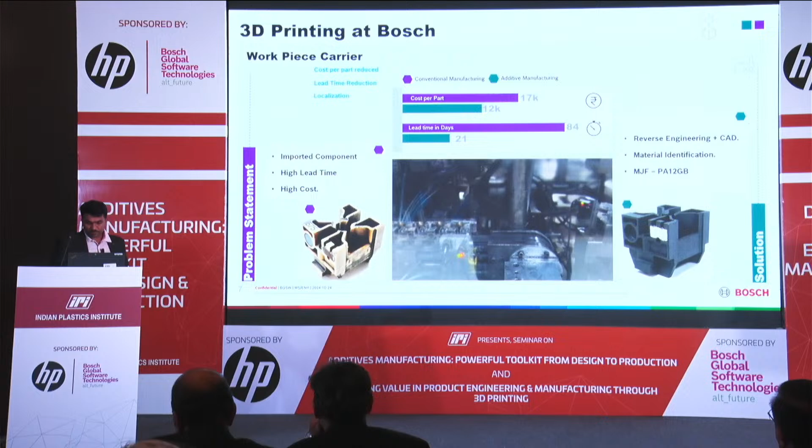This is another example, a coolant nozzle for one of the grinding applications. If you look at the existing coolant nozzle, the flow was turbulent and was not falling onto the product or onto the grinding tool. Because of that they were having NTZ and NHZ issues. This was the problem we got, and it was designed for a metal part. Now what we have done is initially started using our in-house FDM printers.

We made a first version of the design. We were able to address the NTZ and NHZ issue, but FDM parts were still leaking. So ultimately we had to go with the MJF process using GB material.

We were able to reduce the rejection rate, the quality defect rate, to less than 1%, earlier it was 10%. Every day they manufacture almost 3,000 components, and around 300 used to be rejected because of NHZ and NTZ issues. Now, because of the laminar flow, the rejection rate is 1%, and the machining cycle time got reduced to 49 seconds from 72 seconds.

As I said, the workpiece carrier became the sweet spot. We have now done almost more than 12 different varieties of workpiece carriers. You can look at the lambda sensor, PSR, ABS, and the injector.

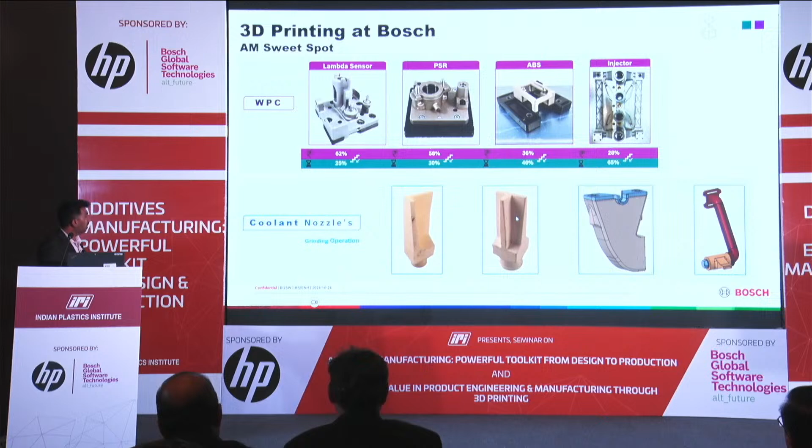And these are all different coolant nozzles for different grinding applications.

Coming to the second area, A and B proto samples. 3D printing is really proving to have a vital and permanent role in product development, accelerating, improvising, and bringing a lot of customization. Let's look at how 3D printing is enabling new product development.

This is one of our healthcare components. Five years back, Bosch was very new to healthcare, especially this kind of product. They wanted to fine-tune the design and also finalize the material and manufacturing process. For that, we used multi-jet fusion technology, MJF, with PA12 material.

When we had the component in our hand, we were able to fine-tune the design. We were able to finalize the material because we anticipated, in one of the products, shrinkage and warpage. Because of the 3D printed part, we were able to change the material from plastic to metal, which made our development cycle faster.

There's a famous saying in 3D printing: if a picture is worth 1,000 words, in this context, a 3D printed prototype is worth 1,000 meetings. This is a classical example.

Similarly, in power tools, for one of the drilling machines, when we produced initial samples, one of the child parts was interfering with the housing. To rectify that assembly, we started with liquid-based technology using transparent material, which helped us identify which child part was damaging the housing. But to run it for 300 hours, we needed an engineering-grade strong material, so we used the MJF process with PA12, and tested it for more than 300 hours.

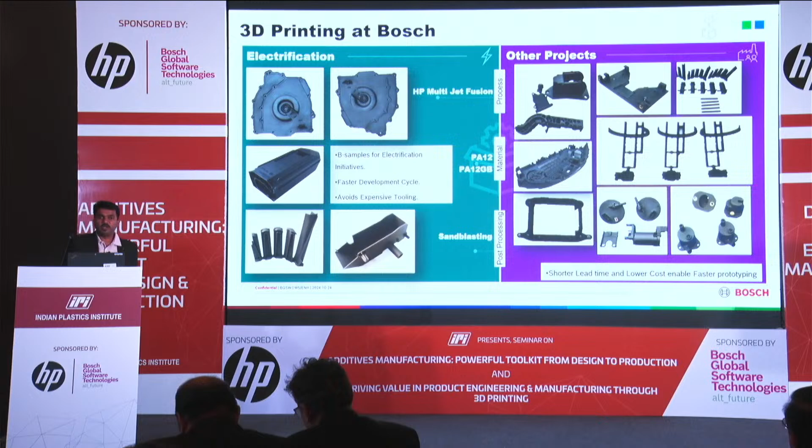These are some of the other projects we have done, where overall development time, cost, and lead time have all been reduced.

So finally, the facts and figures. So far we have printed around 2,000 components. Out of that, 40% belongs to metal, and 500 parts are re-engineered, meaning we did the DFAM.

We have to do the DFAM to get the maximum benefits. Otherwise, 1:1, since it is 3D printing, material cost is very expensive compared to conventional, so we had to go with the DFAM. We did 500 parts re-engineered, and we have saved $0.25 million USD for all the Bosch plants.

We have been supporting 8 Bosch plants in India, and our team size is 5. We are working for design and simulation.

On average, we have reduced around 40% of the lead time, and cost reduction is 25% in all the projects. With 3D printing, you cannot sell the topic or give an innovative solution only by keeping to 3D printing. You should have conventional knowledge. That's the reason I mentioned hybrid.

Since we do a lot of optimization and part consolidation, a lot of material is saved. That's the reason I brought up reduction in carbon footprint. With this, I'm open for questions and answers. Thank you so much.